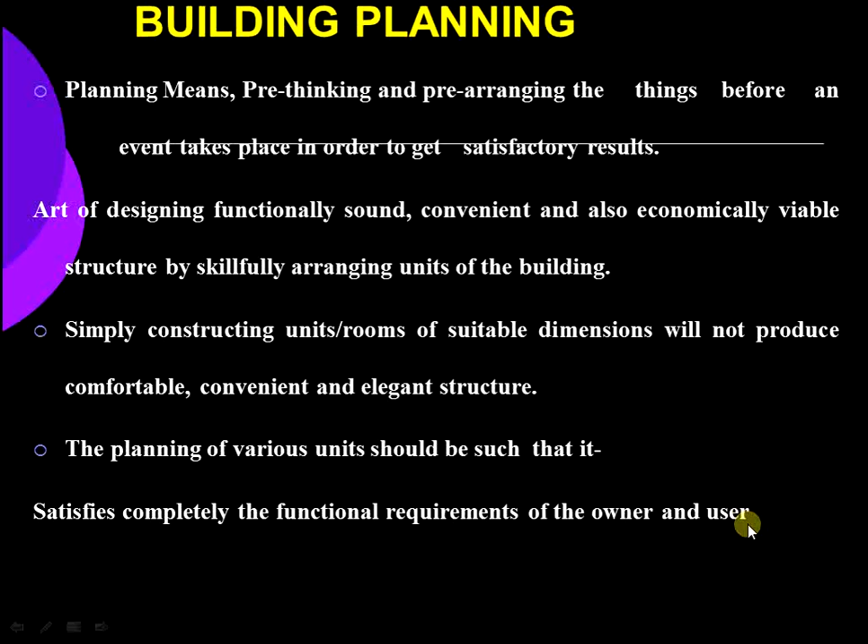The architect's function is to design the building, and the civil engineer's work is to execute as per the design prepared by the architect, that is, to construct it.

Under civil engineer, we have structural engineer, specialist firms, building supervisor, builder, material supplier, and arbitrator. The civil engineer is responsible, as a structural engineer, for designing the structural elements like beam, column, slab, foundation, that is RCC. Specialist firms handle special construction like lifts.

Next is foundation, such as pile foundation, and many more. The building supervisor supervises at the time of execution of the building. The builder builds the building. The material supplier supplies material as per requirement. The last one is the arbitrator. All of this is related to the civil engineer.

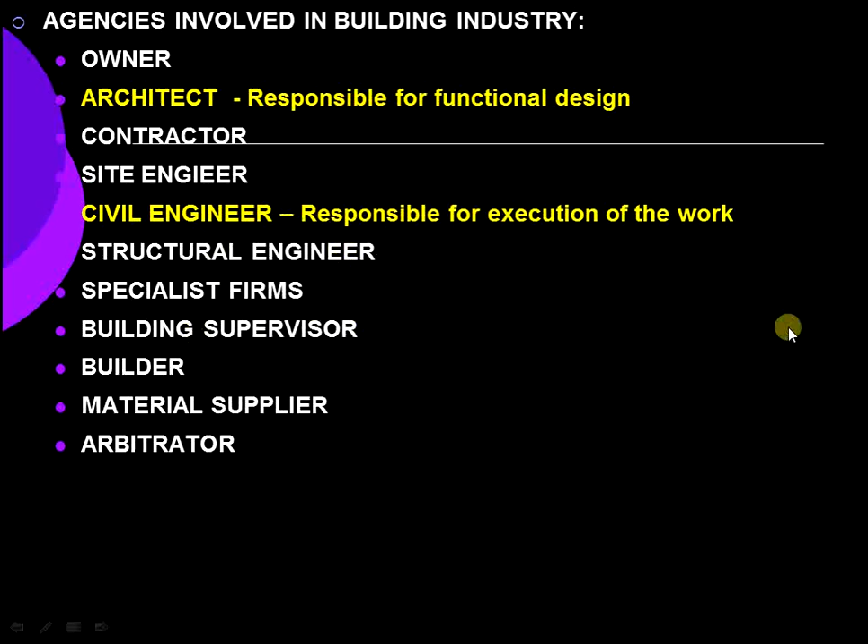The next point is principles of building planning. The architect prepares the design of the building with the help of the following principles of planning. There are 11 principles: aspect, prospect, privacy, roominess, grouping, circulation, furniture requirement, flexibility, sanitation, elegance, and the last one is economy.

These are the principles of planning before design; we have to use these principles of planning at the time of design of the building. We will see them in detail.

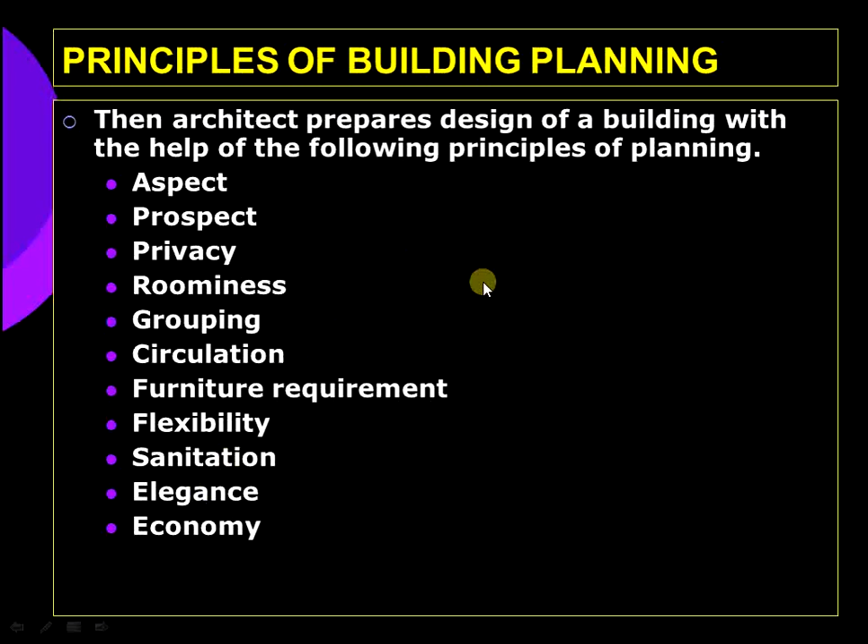Next point is the sun diagram. We know the sun rises in the east direction and sets in the west direction. This is sunrise and sunset.

Now we have to see the sun passing from east to west during winter, and also this is the summer sun.

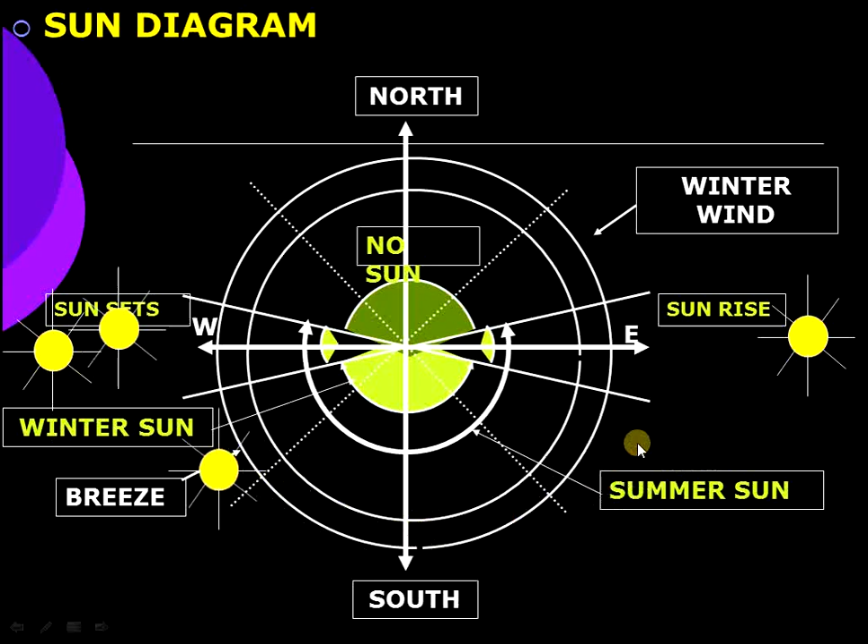Each room requires a perfect or better direction. For the bedroom, the better direction is southwest, west, or northwest, because of the effect of receiving plentiful breeze in summer.

The kitchen should always be designed on the east side or northeast, because of the effect of receiving the morning sun, which is germicidal. It purifies the air, should be well illuminated, and cool in the afternoon. That is the advantage of designing the kitchen on the east side, receiving the morning germicidal sun that purifies the air inside, while staying illuminated and cool in the afternoon.

The dining table or dining area should face southeast, south, or southwest. The factor is proximity to the kitchen and it should be cool.

Next, the drawing room or living room should face southeast, south, southwest, or west. The factor is adequate natural lighting during winter and obviating sun during summer. For the reading room, most important for students, the direction is north or northwest.

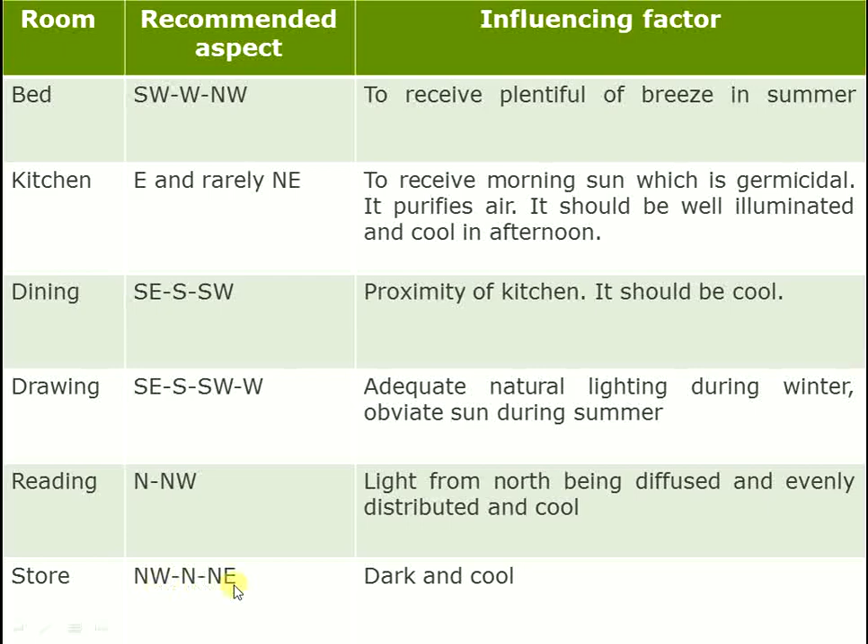The reading room should be designed facing north or northwest, because light from the north is diffused, evenly distributed, and cool, helping concentration for study. Next, the store should be designed facing northwest, north, or northeast, because it should be a dark and cool place.

Next, the first type is aspect: the disposition of doors and windows in external walls. Occupants can enjoy the gifts of nature, sunshine, breeze, and view of the landscape, etc.

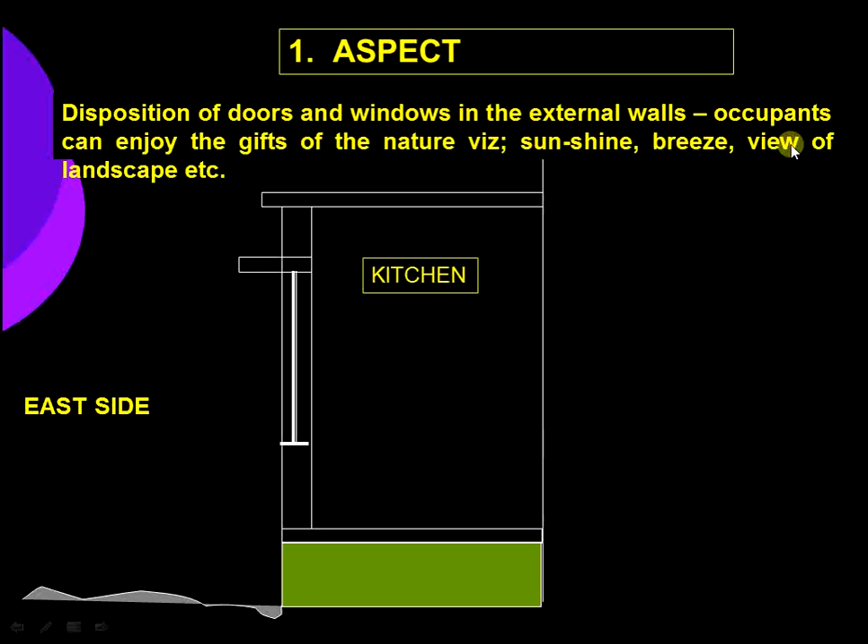This is aspect. What is the meaning? The disposition or designing of doors and windows in external walls, to get the natural effects from sunshine, breeze, and view of the landscape through the windows.

We have to see the sunrise directly inside the house, so it gets sunshine and fresh breeze inside the kitchen. This is the effect of designing the kitchen on the east side. The sunrays admitted into the kitchen are best on the east side. If you design the kitchen on the east side, you will get better results.

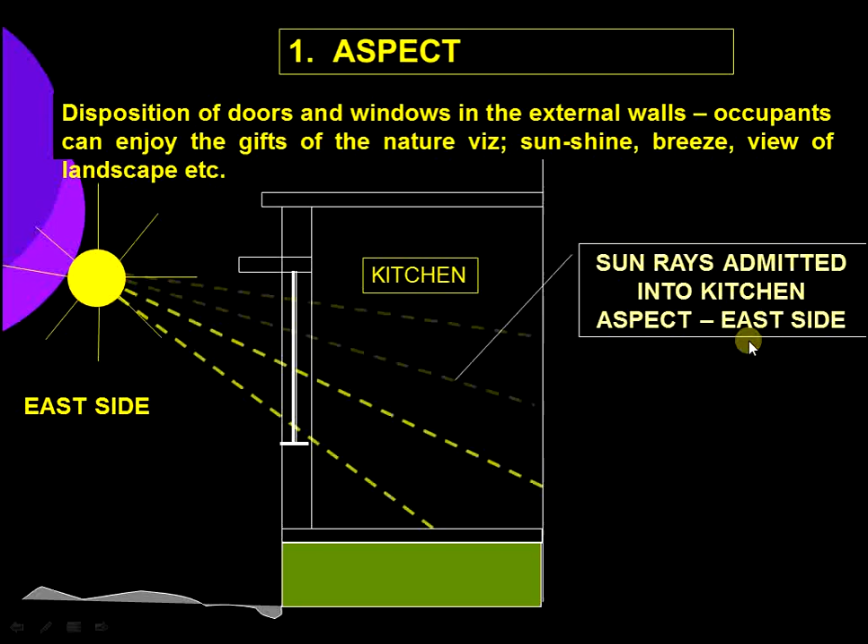Next, aspect of different rooms. We have to see which room requires which direction. The north side should be designed for the study room, store, or staircase. The east side is always for the kitchen. The south side is for the living room, drawing room, or veranda. The west side should always be the bedroom.

East, north, west, and south.

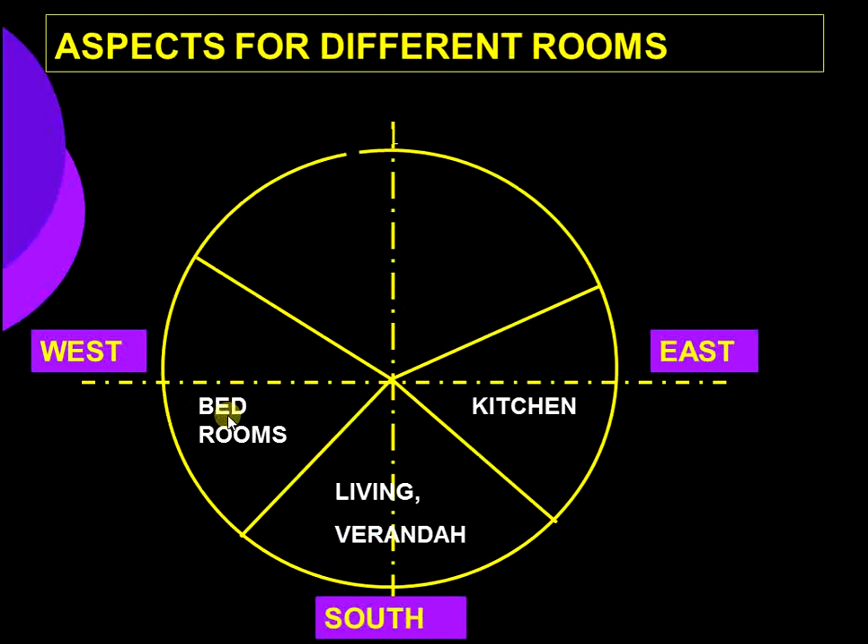Next, prospect. Prospect is the meaning of the outside view seen from inside the room. It is most important for safety purposes. Prospect: the outside view seen from inside the room.

That is the meaning: if we are sitting in the drawing room or living room, or working in the kitchen, and any person comes from outside, we should be able to observe or see them easily for safety purposes.

That is it: the outside greenery cannot be seen from inside, hence there is no prospect. If the window is designed so that the eye is not at eye level, then there is no prospect.

Prospect means that when sitting, the eye should be at eye level, so we can see outside views or scenes, for safety and also to minimize negative effects.

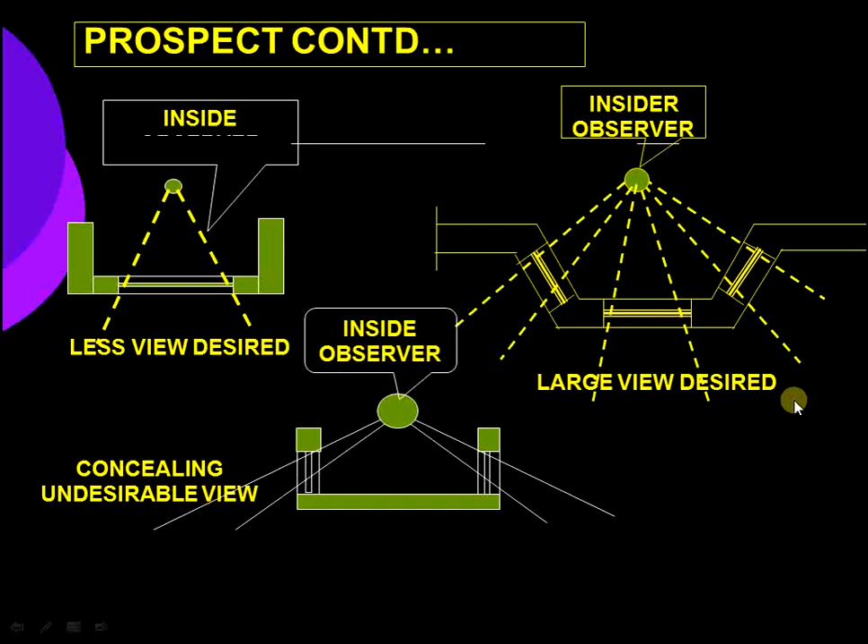Next principle is privacy. Privacy is most important for the safety purposes of the persons. What is privacy? Privacy is nothing but avoiding exposure of the interior space and room to the visitor's vision.

Next, types of privacy. Privacy of all parts of the building with reference to surrounding buildings or roads. We have to maintain privacy for all parts of the building at the time of designing, with reference to surrounding or neighboring buildings and roads. This type of privacy can be achieved by growing plants and trees.

Providing high windows with respect to roads and grounds can also help maintain our privacy inside the house.

Next, privacy of one room to another room. This type of privacy can be achieved by carefully positioning doors and windows. We know that in a house we have separate rooms for all the persons living there - mom and dad have a separate room, brother and sister have separate rooms, and grandmother or grandfather have a separate room.

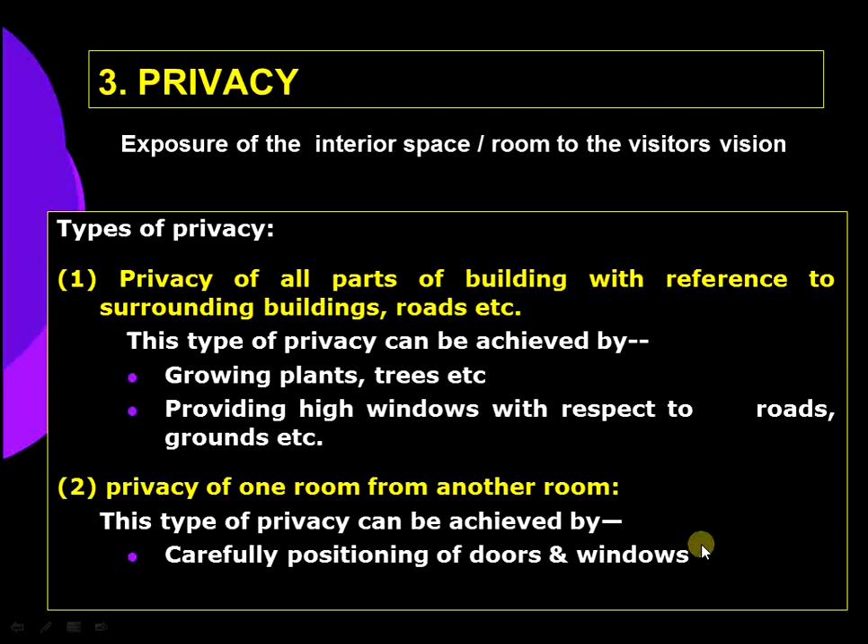This is required to maintain privacy in the house. For this purpose we design partition walls, using wood or plywood partitions. This helps maintain privacy between us.

First, privacy depends upon placement of doors and windows - the opening is the most important factor. If your house is at ground level, maintaining privacy becomes important. Here we see that if the window is positioned directly in the center, an outside observer can easily see the inside view, and that time we cannot maintain privacy.

Next, if the door is positioned to the side, the observer can see only some part of the inside view. This is called moderate privacy.

If we design and build the door at the corner side, and also place the window there, the observer can see only a small area of the inside scene. This gives us privacy at this location or room. This is the perfect or maximum privacy maintained inside the house.

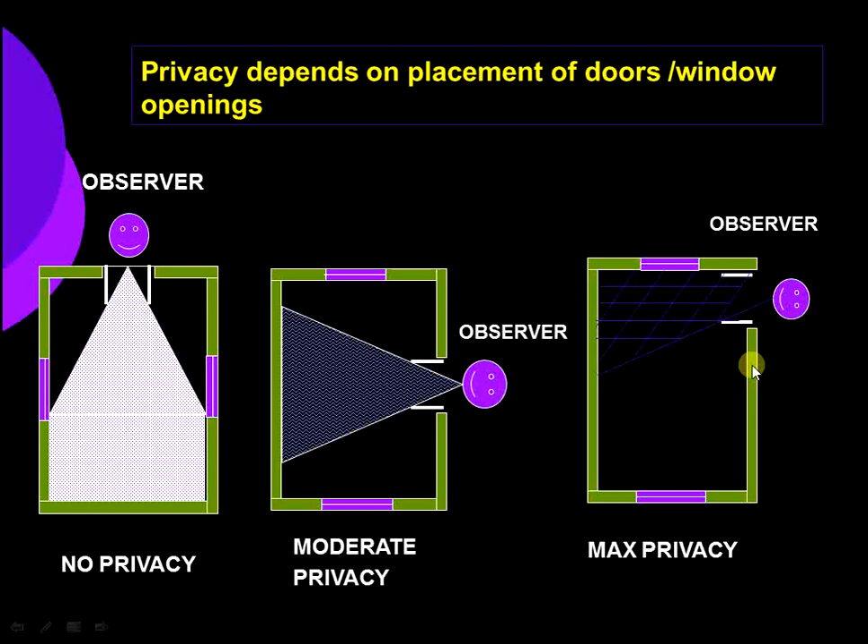This is a very important part at the time of building design. Privacy is most important from outside to inside, and also between the persons inside - we have to live with 4 to 5 people in the house. We have to maintain privacy between us, because privacy is a basic right of the human being.

Next, internal privacy can be achieved by providing curtains and screens. We know we have to provide curtains at the window for maintaining privacy, and also provide screens or dark windows.

Next, avoiding windows in interior walls of the room. We have to avoid or not permit windows in the interior walls of the room. This helps us achieve and maintain privacy inside the house.

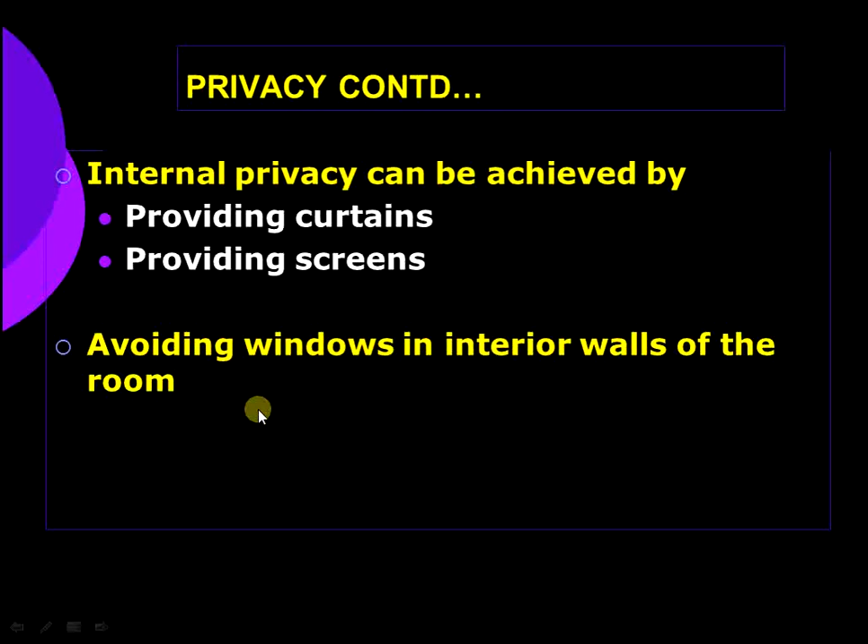Next principle is roominess. Roominess is nothing but getting maximum benefit from minimum dimension or space of a room - maximum output from the minimum space available in the room.

The rectangle shaped room gives the feeling of more space than the square shaped room for the same area. Here we see the rectangular shaped room gives a feeling of more space compared to the square shaped room of the same size. Here we get maximum output or benefits from minimum size or minimum space of the room.

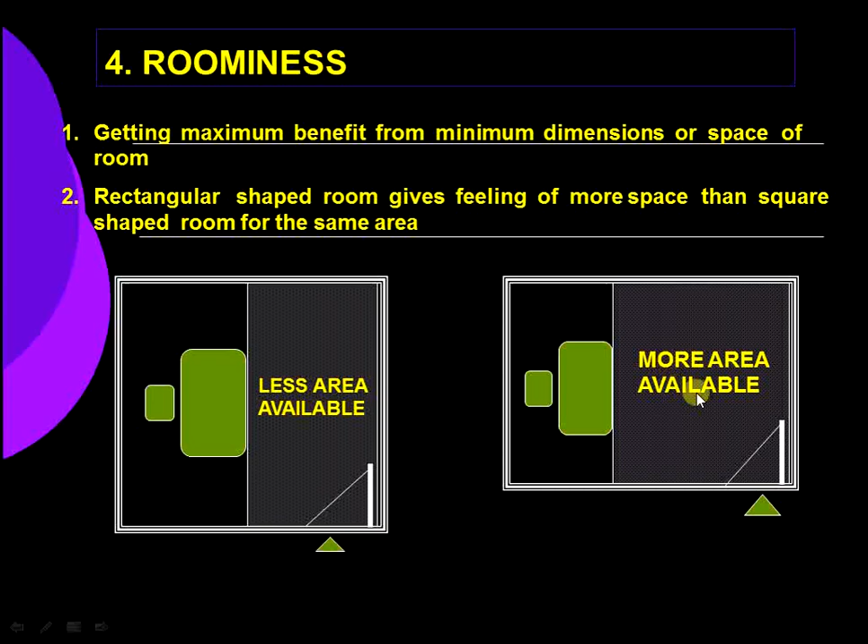Next, grouping: the arrangement of various rooms in relation with their function. The design of the grouping is nothing but the perfect design of the building, inside all the aspects of the building - that is kitchen, dining, storeroom, bedroom, stair, and living.

The kitchen, bed, storeroom - the kitchen here we have to construct, and dining table is here. Then how can we serve the food or serve the lunch or dinner? And here is the stair, and here is the living. That is improper grouping.

Grouping is nothing but the perfect arrangement of the rooms with their functions - that is the meaning of grouping.

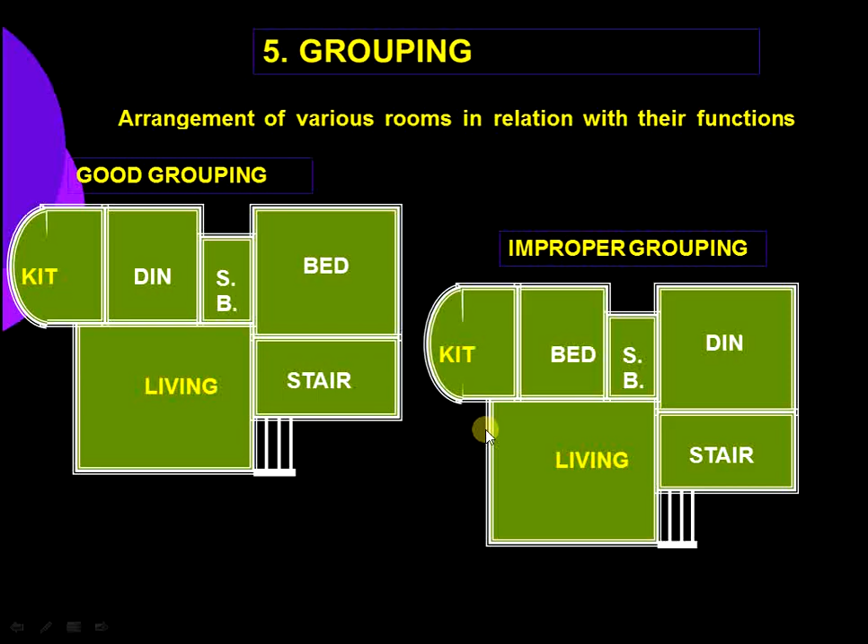Next, circulation. Horizontal circulation is the passages, corridors, verandas. Circulation is nothing but what helps us go in vertical or horizontal directions. For horizontal direction or horizontal circulation, that is the passage, corridors, or verandas. For vertical direction or vertical circulation, we have to use stairs, lifts, escalators.

Here in the circulation example, this is a door and this is another door. The distance between this horizontal circulation - if doors are placed poorly it is bad circulation. If we design the doors in front of each other or at different directions, we can easily circulate in minimum time - that is good circulation. This is called horizontal circulation.

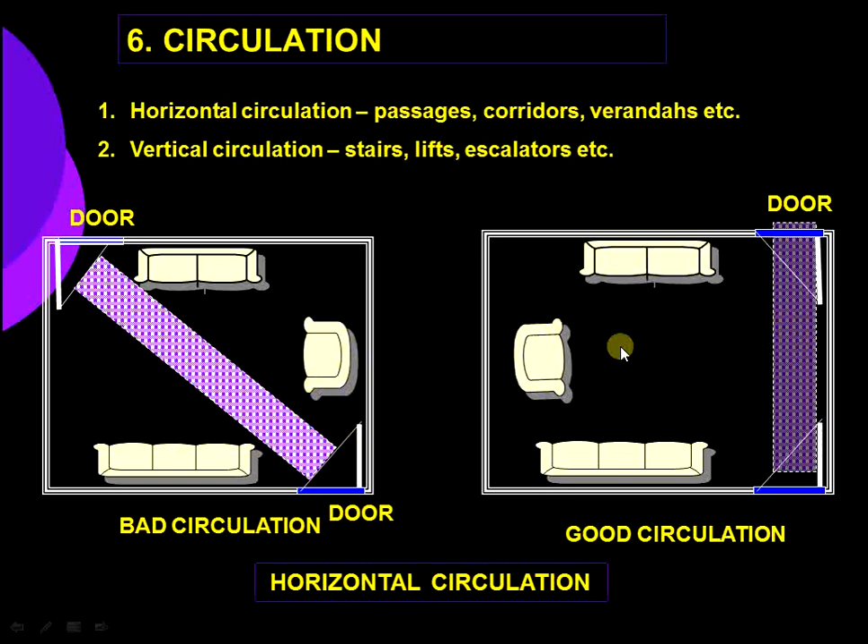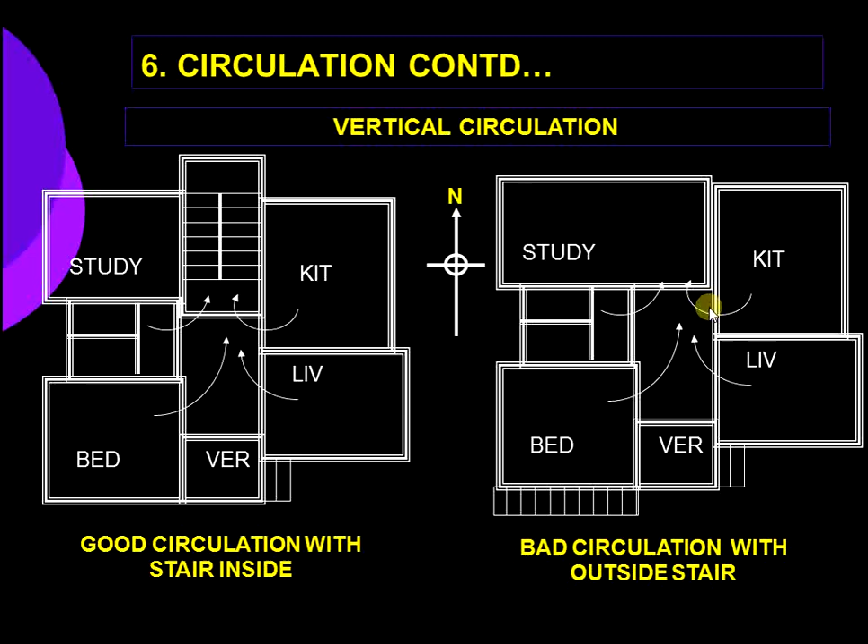Next, furniture requirement. The function of the room decides the furniture requirement of that room. Furniture requirement depends on the room size or your residential size - that is its name, furniture requirement. It's not a requirement or need that is necessary or compulsory for your house to have furniture constructed, but it is a basic right or basic need.

We at least want one bed, two chairs, or one table. But it all depends on the financial condition of the customer or person. That is called furniture requirement - it is not necessary or compulsory. The function of the room decides the furniture requirement.

That is, in the living hall: sofa set, teapoy, TV case, showcase, diwan, etc. In living room we require the sofa set, teapoy, TV case, showcase, and diwan. In bedroom: single or double beds as per demand or requirement, dressing table, and almirah. In dining: the dining table, chairs, and cupboards.

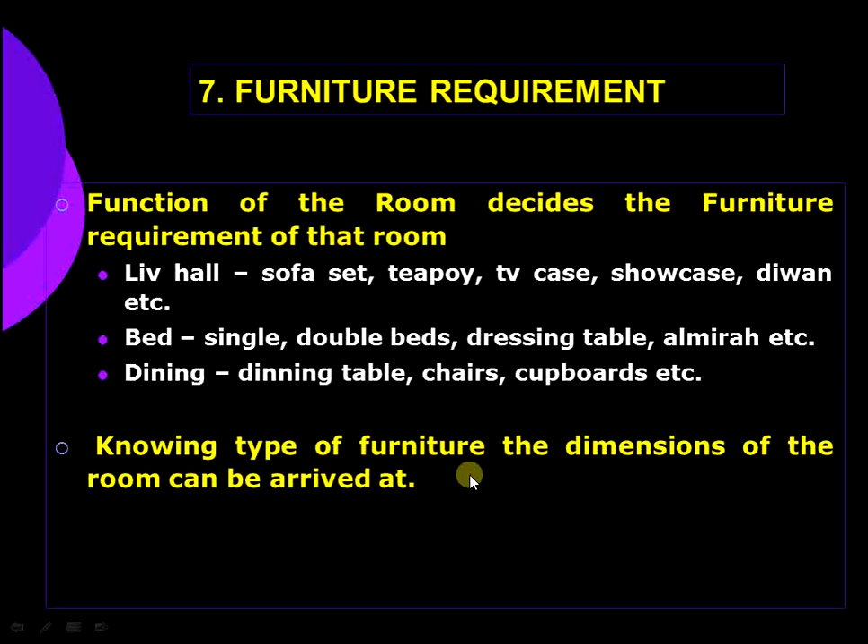By knowing the type of furniture, the dimension of the room can be arrived at. We also see that most space is required for furniture - it is seen that room dimensions can be arrived at from furniture dimensions. Most space is taken up by furniture setup. In old days, it was avoided - only the need or requirement was one single or double bed, two or three chairs, or a single teapoy. It's a required necessity for a regular house.

Next, flexibility - to facilitate accommodation of changes in the plan of the building in the future, as necessary. We can design the building for future expansion or future changes - that is nothing but flexibility. We can change the living room into a kitchen, or change the bedroom into a living room, as per future conditions or future expansion. This is to make the design flexible, but it is not always possible in all building designs - it requires more space for designing the building.

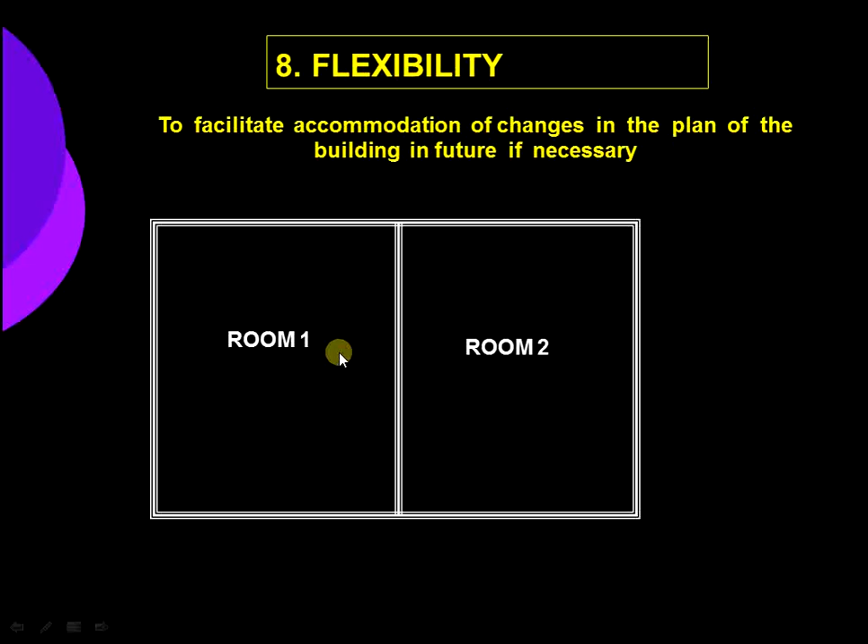Here we see there are two rooms, but their partition is to be removed. After the partition is removed, we get one big hall. This is flexibility.

Next, sanitation. Sanitation is nothing but lighting, ventilation, cleanliness, and sanitary provisions.

In lighting, we have natural lighting coming from sunlight through the doors or windows. Next, artificial lighting, that is indoor lighting. It can also be conceal or open lighting.

Next, ventilation. It is either natural ventilation or artificial ventilation. Natural ventilation is good, coming through the windows side. For artificial ventilation, we have to provide fans, coolers, or AC.

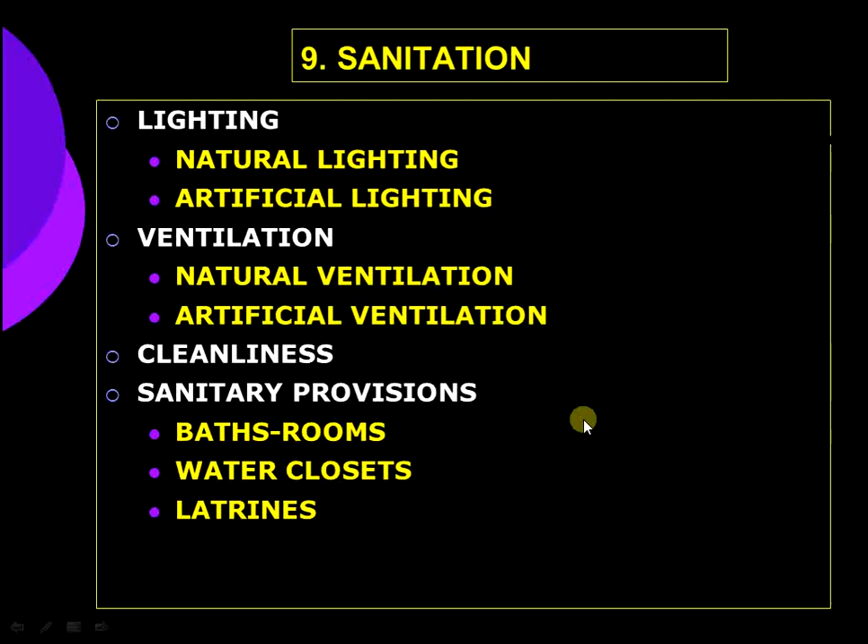Next, cleanliness, and last is sanitary provisions. We have to provide WC, bathrooms, and latrines in the house. Next, elegance.

Elegance means the aesthetic view of the building, or the beauty of the building. It is nothing but the aesthetic or architectural view, or the outside view of the building. The elegance of the building can be achieved by increasing the plinth height of the building, treatment of exteriors of buildings, sloping roof, and projection.

Elegance of a building can be achieved by increasing the plinth height of the building, treatment of exterior of the building, sloping roof, and projections.

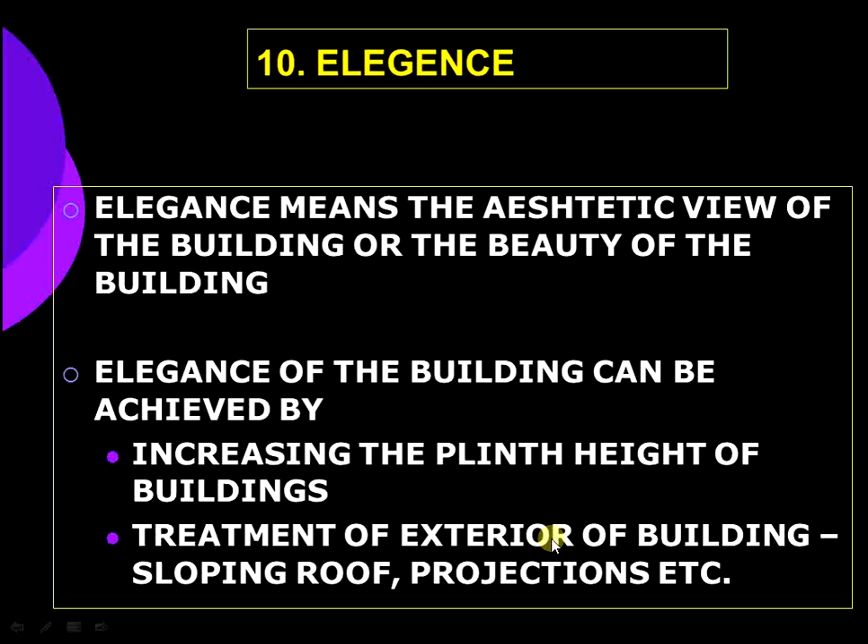We have to see the various designs of buildings; they are not all the same. As per the requirement of the person or customer, we have to design the building, such as a public building or school building.

There is an aesthetic or architectural view. Also, while traveling, we often see a special building with a special aesthetic view, and we say, wow, what a building, what a design. That is elegance.

Next, last but not least, is economy. All the principles depend on the economy or financial condition. The minimum dimension of the room, doors, windows - for economy, we have to design the building with minimum dimensions of the room, doors, and windows.

Simple design of windows, that is wooden; we have to use wooden material. Next, providing minimum height of the building. The normal height of the building is 9 feet or 10 feet.

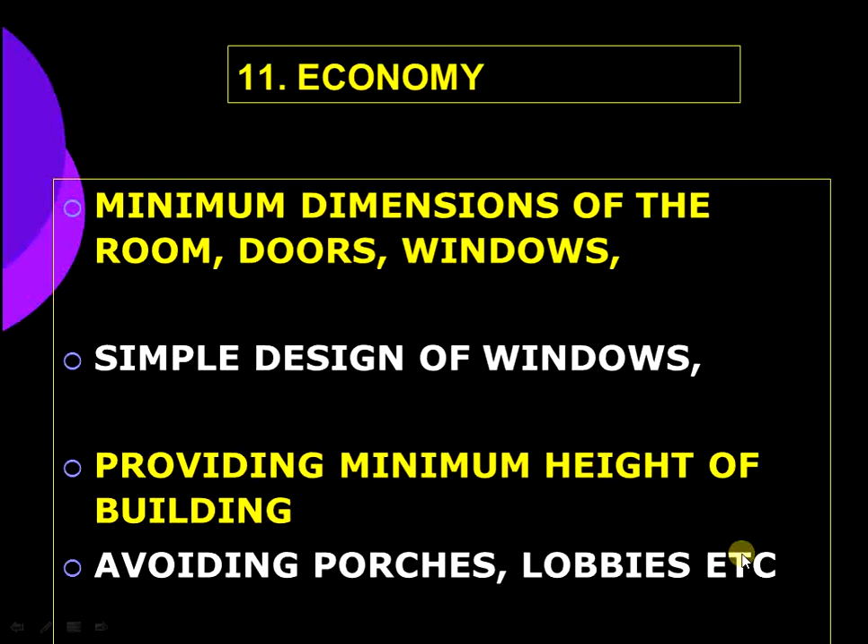Next, avoiding porches and lobbies, because they are very costly. It is nothing but a cantilever section of the building, which causes more cost.

Next, FSI, the floor space index. All of this depends on the FSI. The FSI is different from section to section or zone to zone. In the municipal section, Sangli municipal has a different FSI, Mumbai has a different FSI, and Ichalkaranji also has a different FSI. It depends on the local authority or local municipal corporation's FSI value.

What is the floor space index? The ratio of total built up area of all floors to the plot area of the building is called FSI, or floor space index. It is nothing but the built up area divided by the plot area.

The FSI is fixed by the local authority and is different for different areas and different buildings in the city. A public building has a different FSI, a residential building has a different FSI, and a mall has a different FSI, depending on the building type in the city.